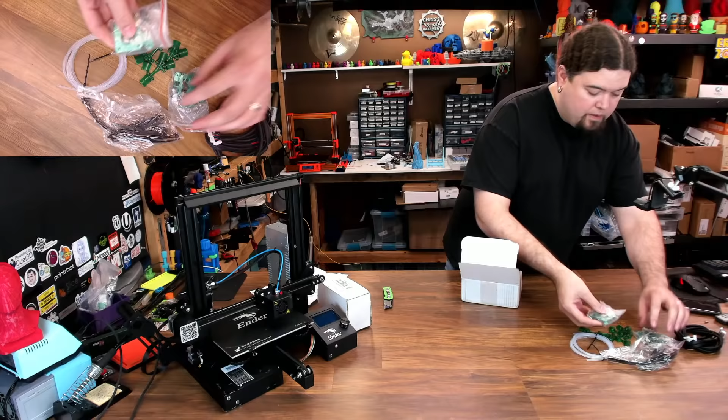Zip ties. Here are all of our Y pieces. You'll notice we have half of the 4-color tree. I should have transitioned. That's because you put 2 of those together to make your 4-color tree. I don't know why that was zoomed way out, but there you go. Everything is green to go along with the chameleon motif. You have 2 green extruder sets. These are all MK8 style extruders.

You have a couple of motors, a couple of L brackets to position those said motors, and then you have your switches. And that's what's kind of interesting about this whole setup. Now, you only need 1 of these for the 2-color kit, but they give you those anyway. And that's what makes this interesting, is that the G-code actually tags these manual switches to select what extruder to use. And then it goes on from there and gets more complicated. And I believe that all the slicers out there now, 32 extruders is your limit, I think. Don't quote me on that, but I think that is the current limit. So there's all the stuff you get.

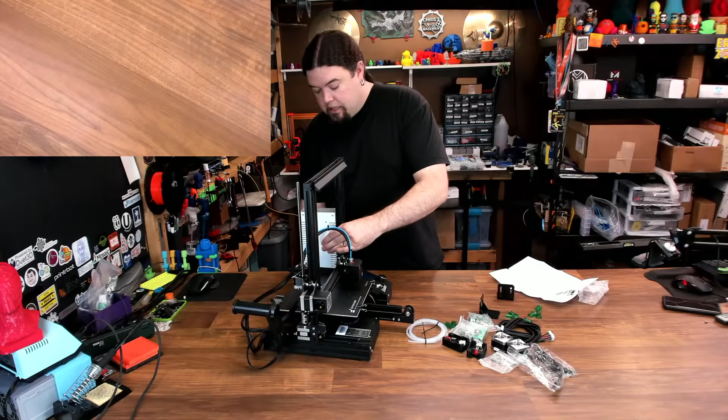We're going to prep the Ender 3 for this installation. So if you're not familiar with a Creality style machine, these were some of the first ones that you saw with an all one piece.

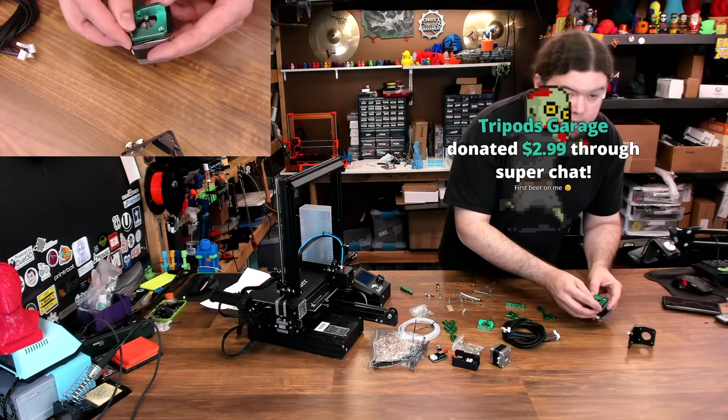I guess we need some wrenches. So this whole thing was designed so that you can use your stock Ender 3 wrenches to put it together.

Chameleon for resin printers. There you go. Robot hut. Yes, it comes with the steppers, the extruders, and the Y pipe. That's pretty much all there is to it. Yes, it comes with all the stepper motors. And it's $50 a color basically. So.

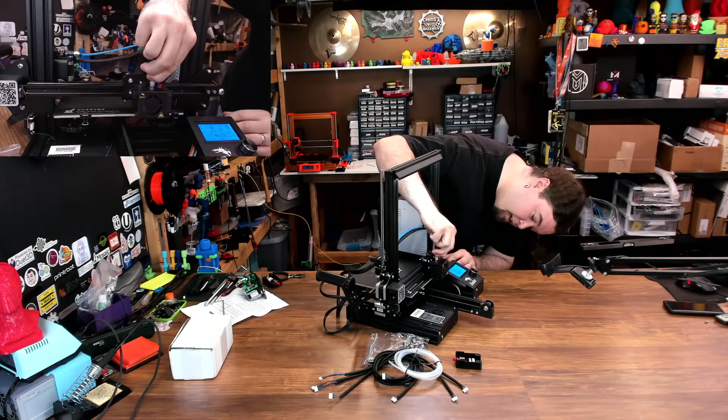Yes, purge tower indeed. So basically all I did was heat up the hot end, and this is going to be the replacement for the stock Bowden tube. Remember this is the flat side. This will go all the way down to the nozzle. This actually gives you kind of a nice handle to deal with that tube. I heated it up so that if there's any filament in between the nozzle and this tube, it'll cook it, and then it'll squish it out for me. And it did. Pretty nice job. Excellent. We're good on that. There's really no filament in the barrel, so I'm not worried about cooling it down. So we'll just turn it off.

Next, since we're looking at this, my QR code has to go. I guess I could just put it over there. Really wouldn't matter. I'll have to get to it with a wrench though.

Do I know what new things are on the SKR E3 V2? So, would you like to look at a V2? Yes, I know about Vorons. I've never had a Voron. I've heard of them, I've never used one. A lot of people tell me that they're good. There's different ones that are decent. I'm not 100% sure, but I have heard of them. Never used one. Would you like to look at a V2? I will give you.

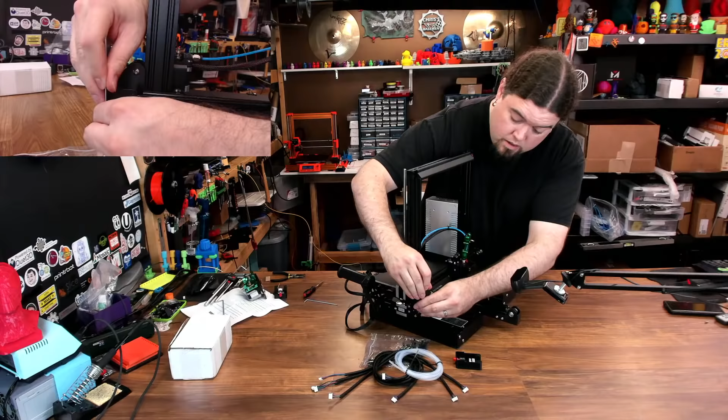Is there something to get old filament off of a heated plate? The best thing that I've run into to get the filament off is to print over it, and then try to get that print to pull that off. Other than traditional scraping or anything like that, it depends what filament it is. I guess if you had little bits of ABS, you could loosen it up with acetone. I'm not sure on PLA.

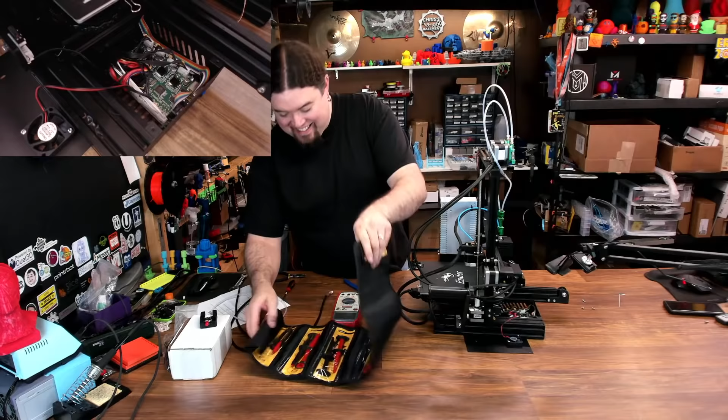Now, if you ask me how to do this, I would tell you to use a ceramic screwdriver so that you didn't short out your board while you were doing it. That's not how I do it. But if you want to be safe, use a plastic or ceramic screwdriver. Some people actually use pieces of filament. Like you can clip the end off a filament and try to use that. So that's one method.

But basically, there's V reference. We're adjusting the current with a trim pot on the board. It kicks out a reference voltage for you to use to gauge what that current's going to be. And the Chameleon motors are high impedance, as Bill said, and they're running at 32, I think is what he said. 36 ohm. I don't remember what you said, Bill, but it's a lot higher than stock. So we need to turn the current down.

And the reference voltage number Bill has gone with is 256. So that's what we're going to attempt to do, and we will get as close as we can. Probably 50 either way wouldn't hurt you much. Do as I say, not as I do, right? That's how that saying goes? 36. Gotcha. This is the extruder stepper driver right here on a Creality board.

You do not want to touch anything other than that trim pot inside here, or all you're going to be able to see is my hands in the way. A good source of ground for your meter is the SD slot. If you can reach the actual output, you could do that as well. So we're sitting at, of course I didn't turn it down, so we're sitting at 730, and we're going to turn down to 256.

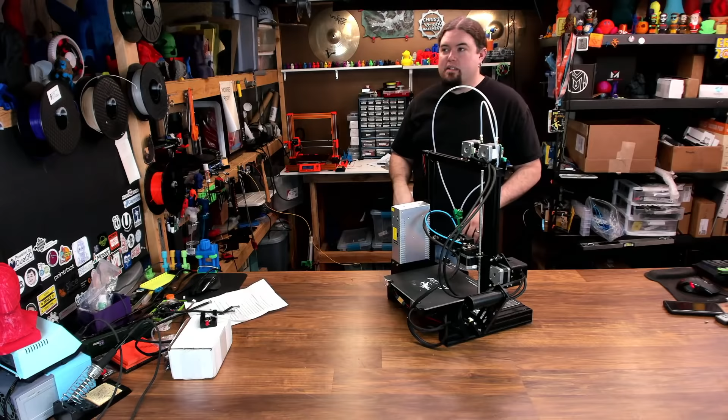Putting things away. There's only a couple things I put away. There's a lot of stuff I still just throw on the floor, though. But I appreciate the accolades, Tony. Backer number 9. But Bill, if you're backer number 9, you kind of have an ulterior motive to getting a 6 SE. I really don't see you adding that to your farm and just going to town. I would think that would be more research purposes. Yeah, I know, man. 32.8. It's been going crazy lately too. Yeah, Espen's from way back. He's been on here forever. 3 years. So what is today? Today's the 29th. I started on YouTube June 22nd, 2017. So a little over 3 years now. Sax, thanks for joining the stream. I appreciate it. Might be. Might be. Fair enough. Okay.

So, how about some screen share? I actually have a stool back here now. I do sit and use the computer once in a while, which I don't do very often. But it's really hard to see the screen when you're looking down on it, actually trying to do something. So, Bill has done all of the hard work for us here. And we are just going to download a whole Prusa Slicer profile. It's all in one INI file. We will download it. Yes, Chrome, we can keep it.

Then, let's open up Prusa Slicer. Prusa, I say Prusa all the time.

Joshua, thanks for coming. It's kind of like an MMU1, yes, kind of.

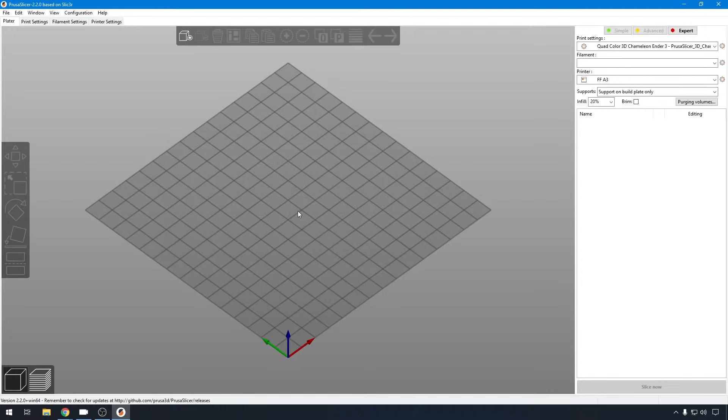And then we will just import the whole thing. Import. I don't know if I need to do bundle or config. Let's try config first. That looks to be just fantastic. We have different colors here. We don't have to use all 4. There's really nothing I need to change. I could just go down to 4, or I could go down to 2, or I could just tell it that I'm going to do 2. I'll just tell it I'm going to do 2.

But this is all of the magic. This G code right here, tool change G code, and I know this all too well because of the tool changing machine. This is everything it tells it needs to do to go hit that switch. The ramming sequences, all of that good stuff is right in here. Well, some of it anyway. And then the rest of it is done in the filament settings. Prusa Slicer has a pretty advanced way of doing this. You get a lot of different options. You can adjust ramming settings and things like that. But this whole thing has been tweaked for the Chameleon already, so we should be good.

Now I need some sort of print. Bill was using these mushroom things that I really liked. The 1-up mushrooms.

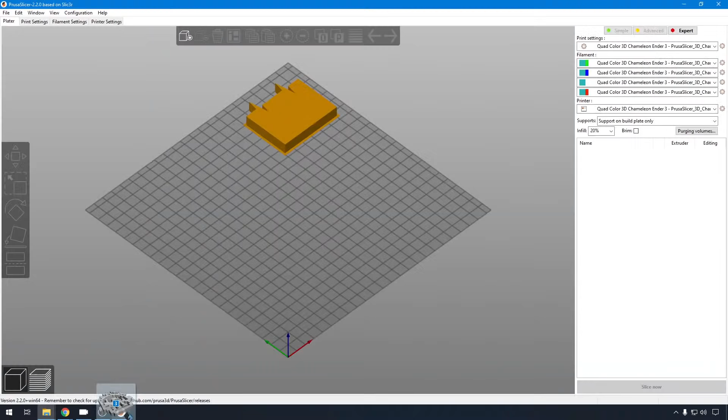Much better. Okay, and this is the cool part about the multicolor and Prusa Slicer. You can just take all of these and drop them right here, and then it's going to say, hey, we've noticed that this is multi-material. Would you like to make it that way? And then I say yes. And then it stacks it how I need to stack it. And then if you go over here and click on the purge block, that kind of takes your preview away so you can see the individual colors. And then you can select over here which

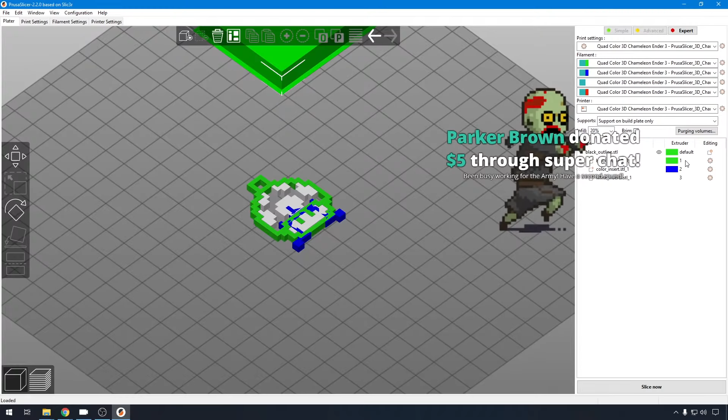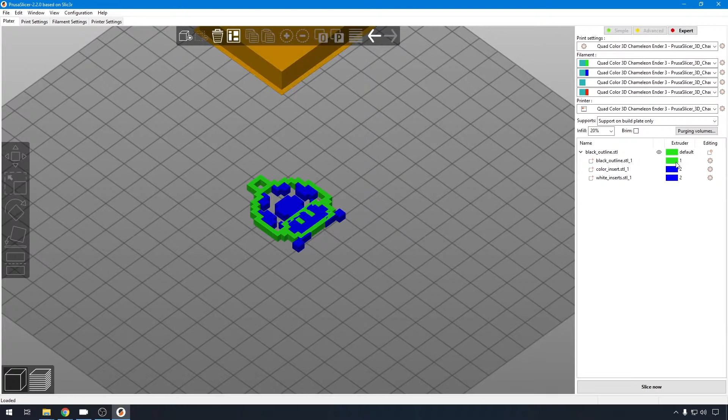So now you can select which extruder you want or what color. I really don't care about the color, but I don't have the 3-color on there, so I'm just going to change this to 2. And then when you slice it, it should just show the two colors, and you have your prime and all that good stuff out here. And then we can throw that on our SD card. What we got?

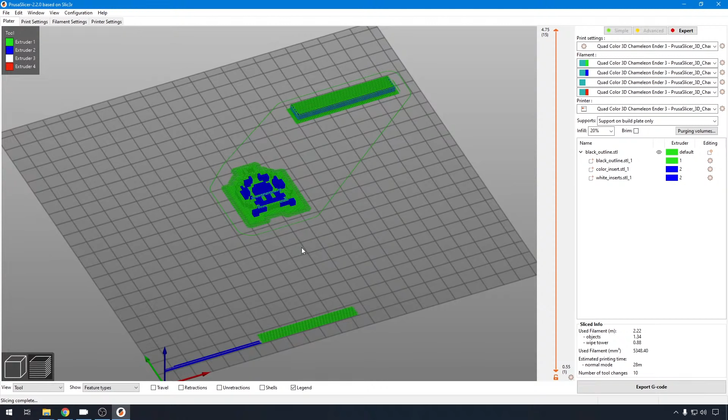It does have quite a bit of support on it, which isn't a big deal. I would rather actually use it in default form like this than try to change it at all, just to see how it's going to work. Oh, the support is probably what's keeping the multicolor together, because when they're divided like that, sometimes they tend to fall apart on you. The blue is not aligned correctly. You're right, it doesn't look right. But is it a problem with the file?

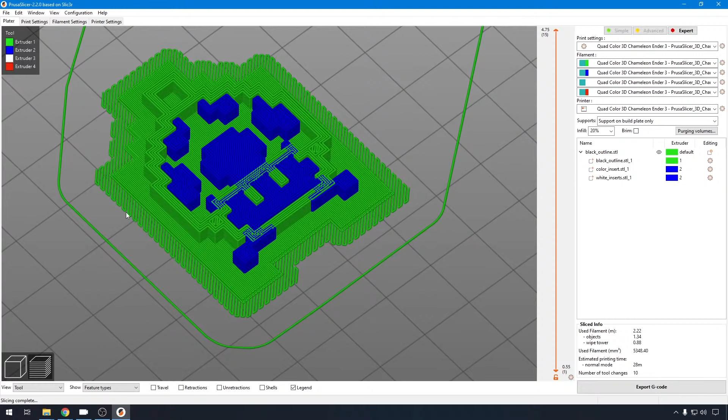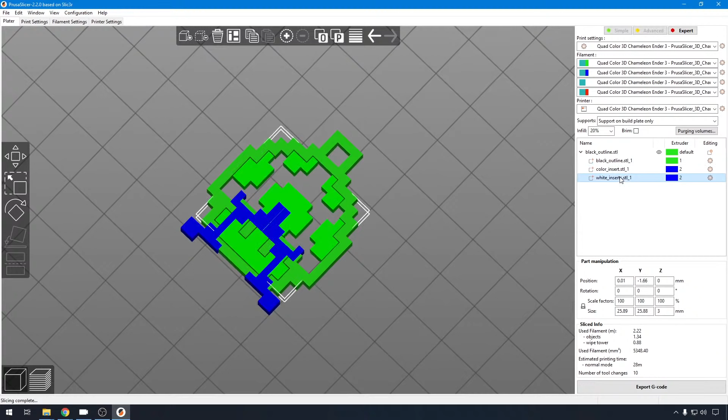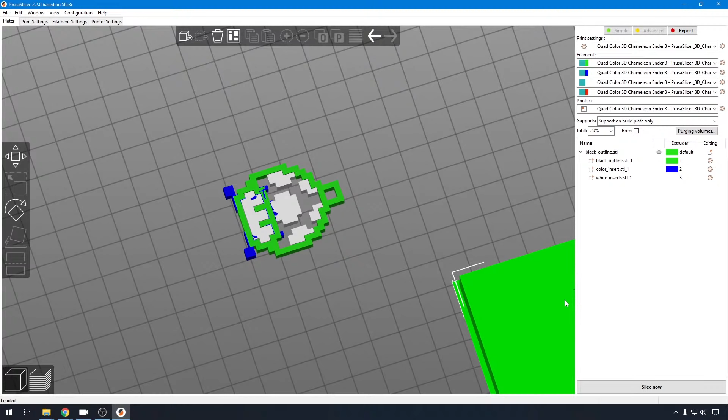Let's try again. It looks messed up. Could probably do that one. Looks all right. Let's pull that in one more time. Does that look right? Oh, no, not the whole thing. Why are you doing that? Not that one. You know, Prusa Slicer has undo on it now.

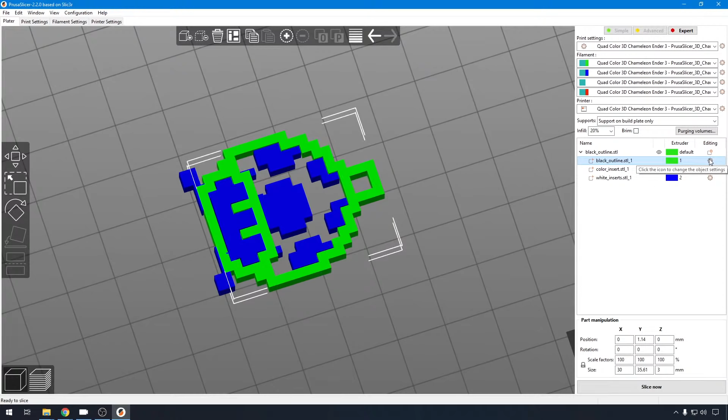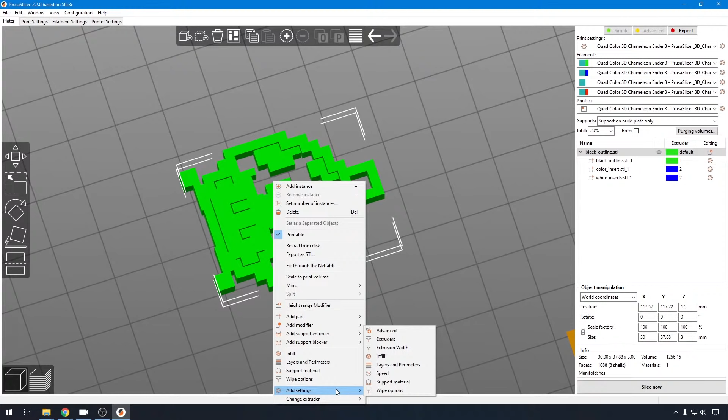Oh. How do I ungroup these? I thought you could just right-click and ungroup them. Add support, scale to print, fix through Netfabb. I'm not seeing the option that I'm usually used to seeing. Oh, maybe it has. Maybe it's already been stacked. Maybe that's what the deal is. That's what it is. They were trying to be helpful.

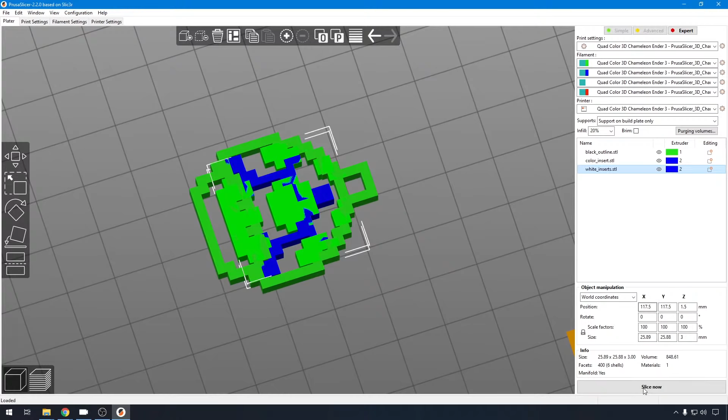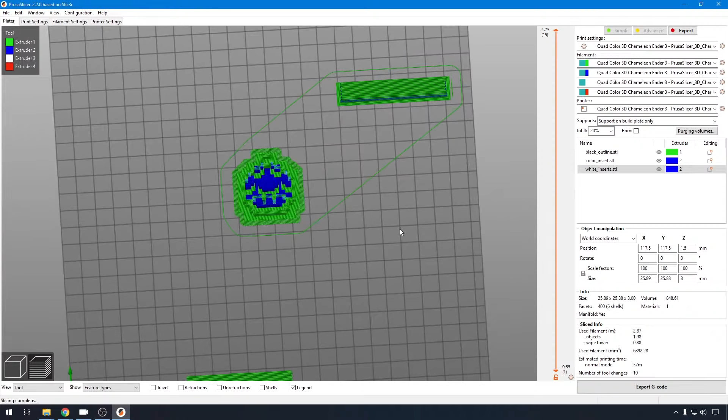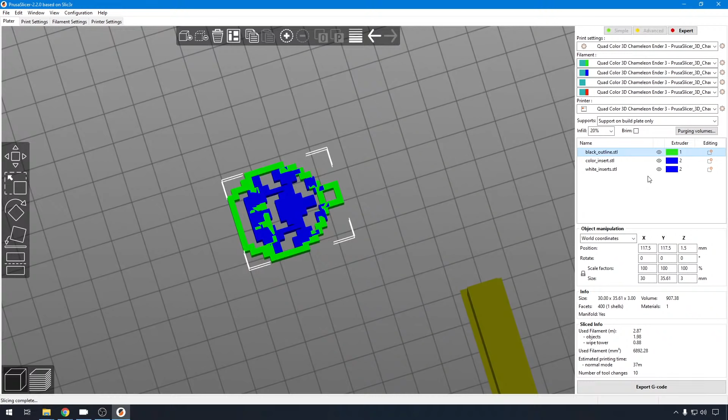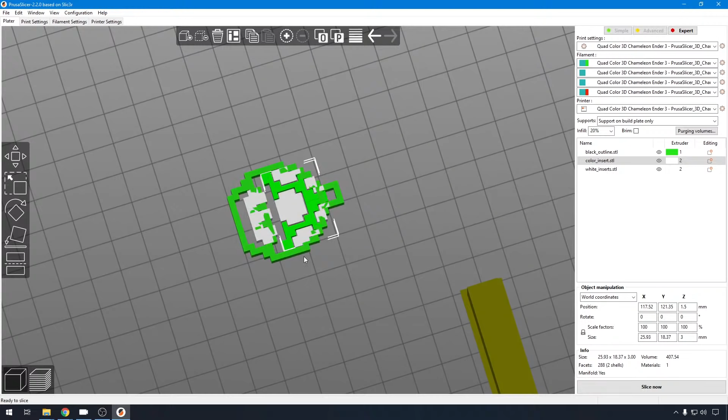That looks better. Okay. I wish it didn't, maybe I need to change this, and I want to change it to that. But now I can probably move them. Is it broken? It almost looked like 3 pieces there for a second. Oh, because it is. I have 2 extruders.

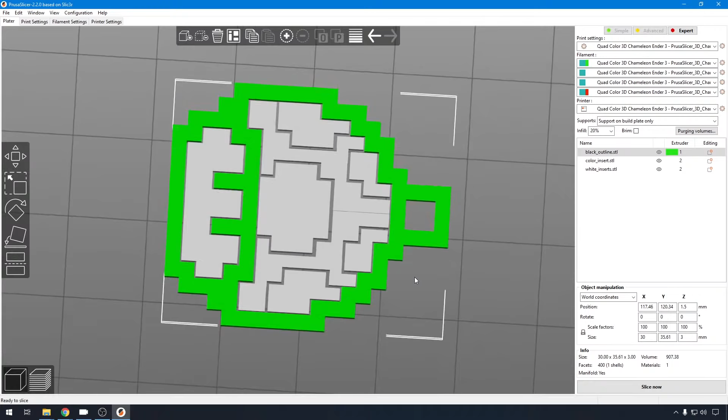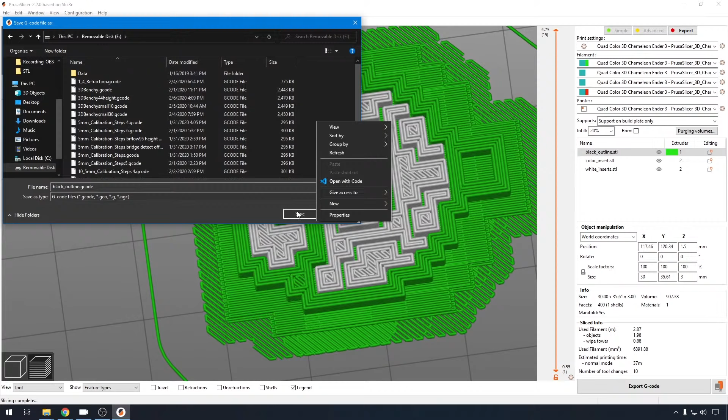That looks better. Cool. Alright. 37 minutes. I wonder how accurate that is. Let's get an SD card. Of course, my SD card scanner doesn't work like it used to. Alright. We're done with that. I have to go find some filament.